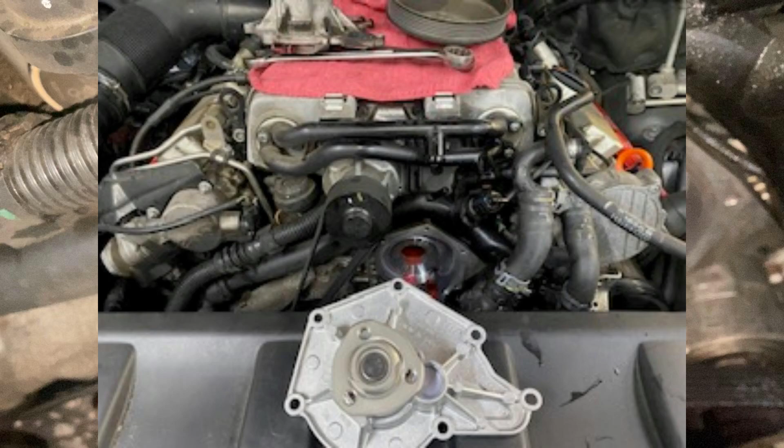Guys, I got a 13Q7 here. It needs a water pump because it's leaking. If you have some knowledge, or even little knowledge, you should be able to do this one by yourself.

Okay, first thing is let's remove the coolant pressure here. Remove the cap there. Then you're gonna come here. You see the two pipes here to the supercharger with the pliers. Remove those clamps. Okay, and then T30 here, so you need a T30 socket.

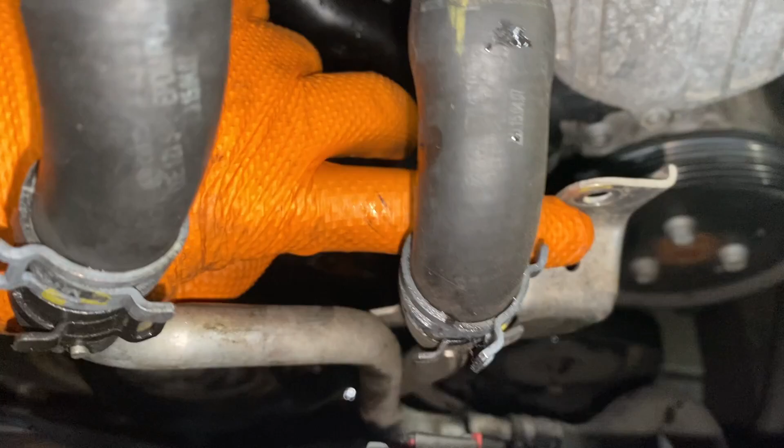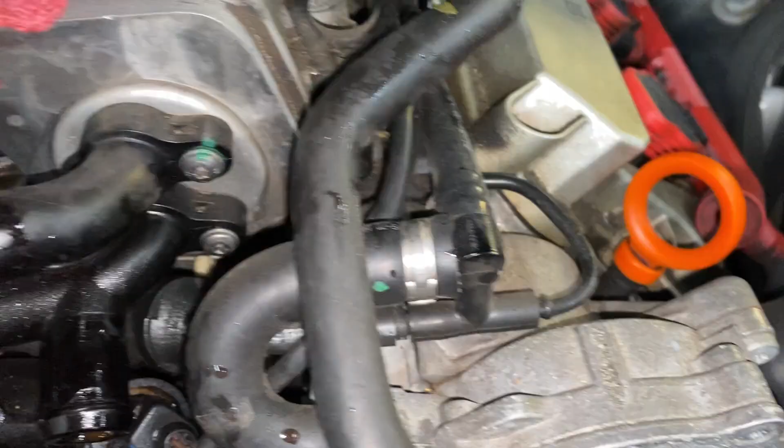Okay, get this. Move the hoses back. Get this guy off, this coolant hose from here so you don't break it. Then the water pump has 7 bolts here, T30s. Okay, 7 bolts. Okay, move that.

Guys, make sure you put something underneath to collect the coolant. Okay, and that's that, guys.

One thing, I will get the belt out of the way. So with a 16mm here, release the tension of the tensioner to the right side. Okay, you could use a wrench or whatever. Go to the right. You could put a pin there too. Put a pin here so the tensioner stays under load, so you could just slap the belt in there later.

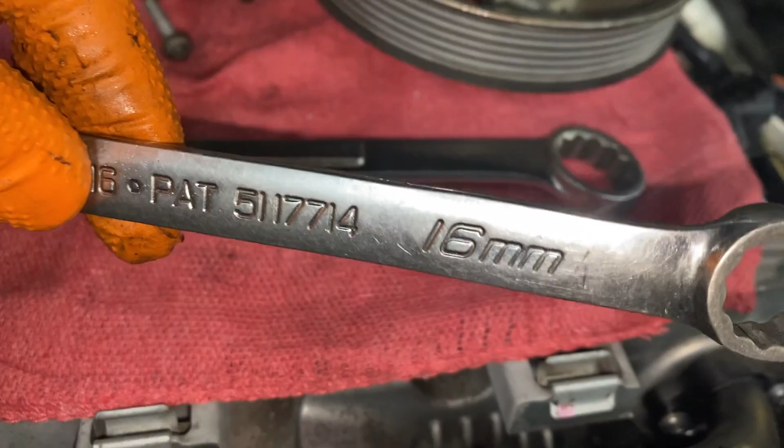But if not, don't worry about it. Just use a 16mm wrench there, like I did here. Push the tensioner to the right and get the belt off. Okay.

And that's it, guys. Then put the new pump in, which I already have, and torque these to 9Nm. Okay, 9Nm. If you don't have that vacuum fill tool to fill the coolant after you're done, just fill it up slowly.

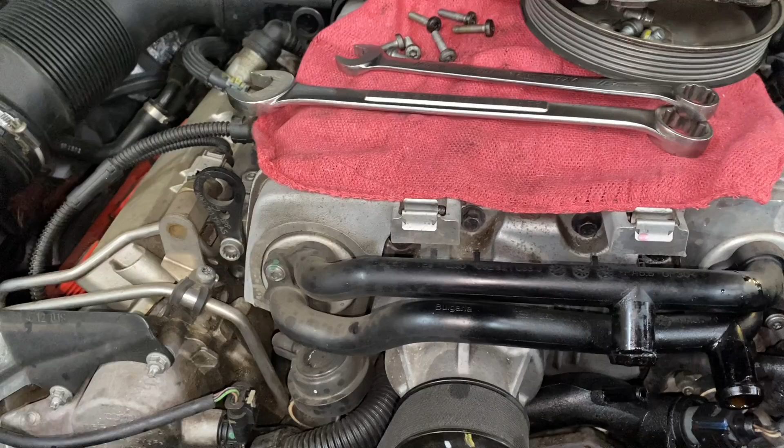Until you get all the bubbles out. Sorry, and that's that, guys.

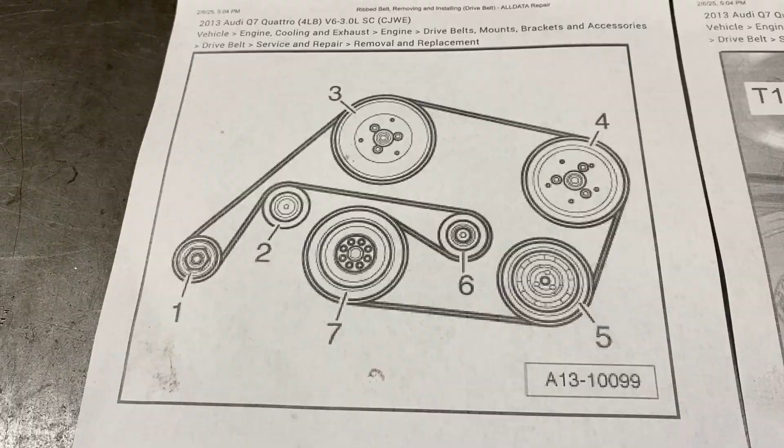Okay, I'm gonna give you the schematics of the belt in case you forget how to pull the belt. See, this is how the belt goes. Okay, this is the alternator tension roller. This is the damper at the bottom. This is the water pump pulley.

Oh guys, I forgot to tell you, you gotta get this guy off too, off the water pump. Okay, that's a 10 triple square right here. Okay, let me show you.

This guy. Okay, once you get these lines out, these coolant lines, then you gotta get - forgot to tell you - the pulley, this guy.

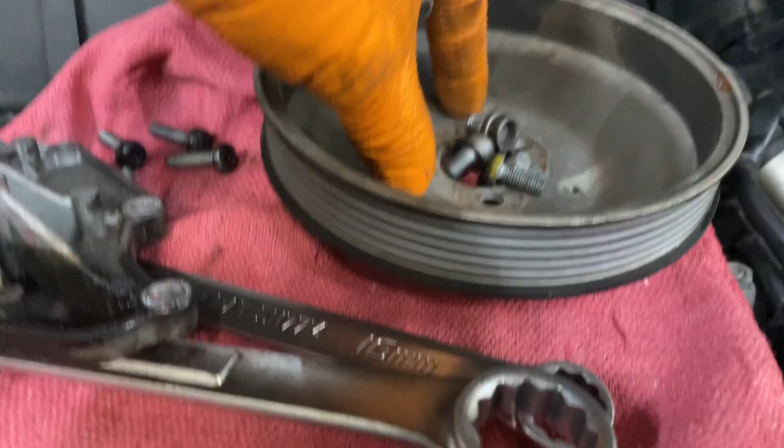Okay, loosen it while having the belt on. Because if you take the belt off, now you're gonna need a special tool to hold this thing in place to then loosen the bolts. So loosen the bolts before you take the belt off.

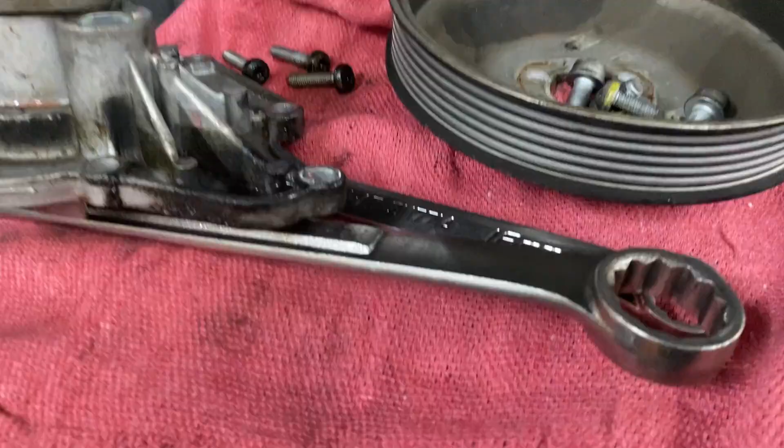And then when you go back, you partially put the bolt there, snap the belt in there, put pressure on the belt - loosen the tensioner, make sure the tensioner is pushing on the belt - and now you torque these things, or tighten it, however you're doing it. Okay, and that's that, guys.

And this is the schematic on how the belt goes. Like I mentioned, see the 15mm wrench there? You're gonna go toward that way, and this thing gonna come up and you're gonna get the belt off.

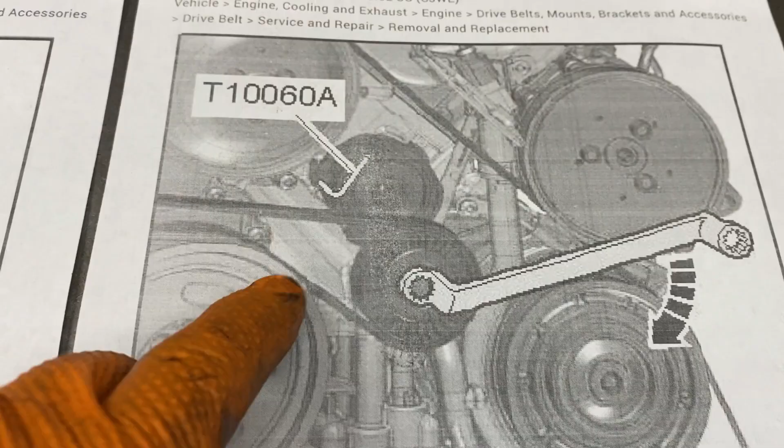But I will get this guy here first, then come here and bring the tensioner to the right so I could get the belt off. Then when you go back in, partially put the bolts there.

Okay, put your tensioner, take out the pin. If you did put one in, remove the pin. Now come and tighten these guys up. Okay, and that's that, guys.